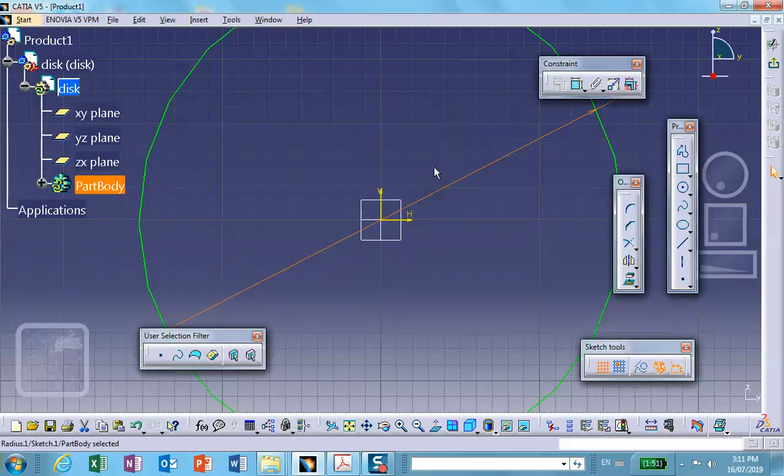And then we draw 3 circles here. This is the one in the center. The radius of all of these is 1. And another circle over there, and another one down here. We're going to position them in just a minute.

This one is diameter 2. This one also - not that one, this one is also diameter 2, and so is this one. Let's put some dimension between the center of this and that line - that's going to be 6.

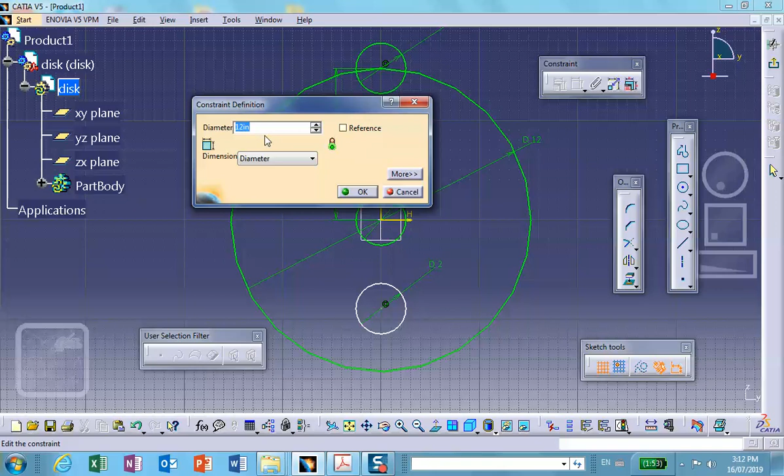Oh, I made a mistake - this diameter should have been 24 actually. That should have been 24. Diameter is 24, radius is 12. Okay, good, good. And then another one between the center of this circle and that guy is also 6.

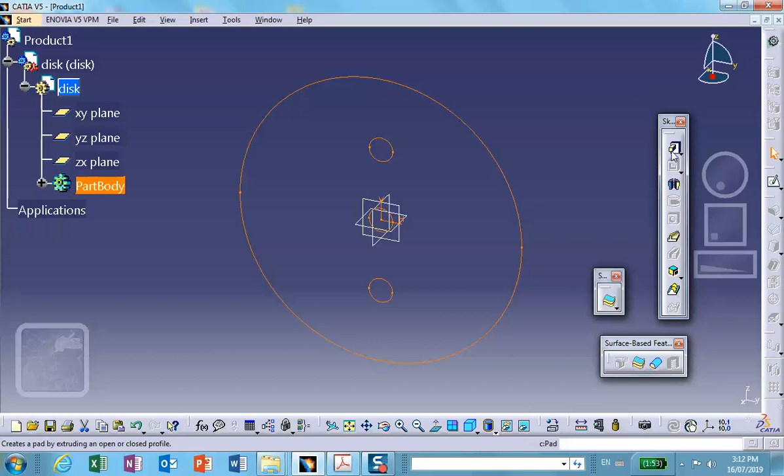So this is supposedly that disc that you see there with 3 holes. So exit, pad it. The thickness you're told is 2 inches, so we make a mirror extent 1 inch in each direction, and that gives us what you want.

Now I can insert the pin, insert a new part in there, and I'll call it the top pin. Right click, properties, top pin, and top pin. Okay, let's make it.

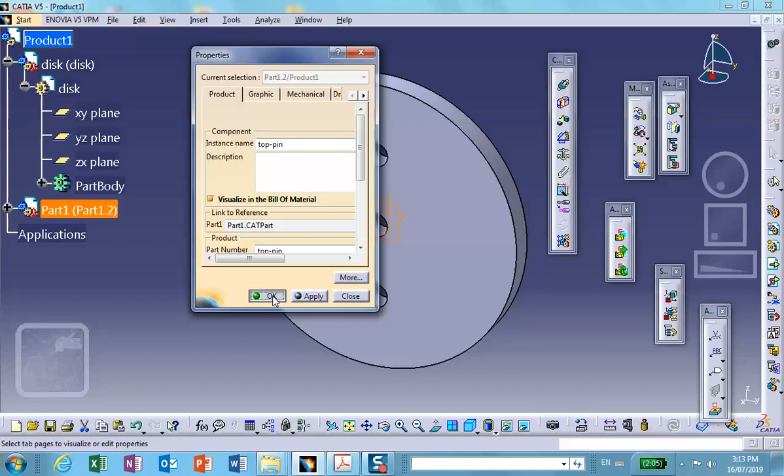So top pin, I'm going to project on that - let's see now - YZ plane. I will project, sketch, and project that circle. There we are. Exit, and then pad it symmetrically by 3 inches in each direction, so total of 6 inches. That's the top pin.

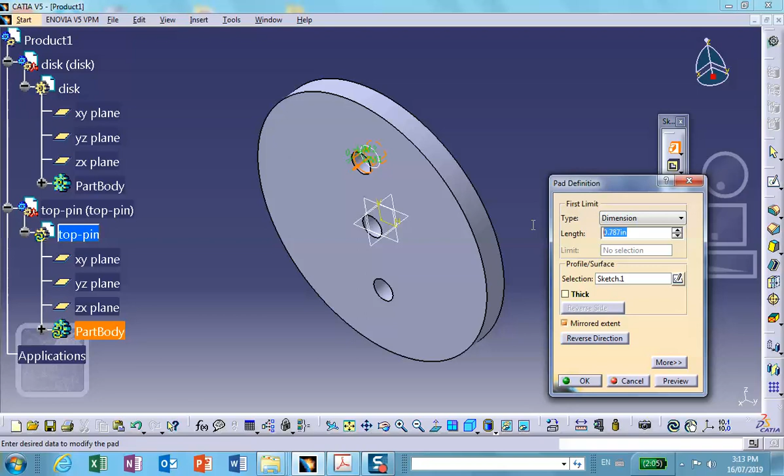Okay, now go back here, insert new part. Of course you can use that pin by copying it, but I'd rather make it properties. I'm going to do the middle one, middle pin - and down here also middle pin.

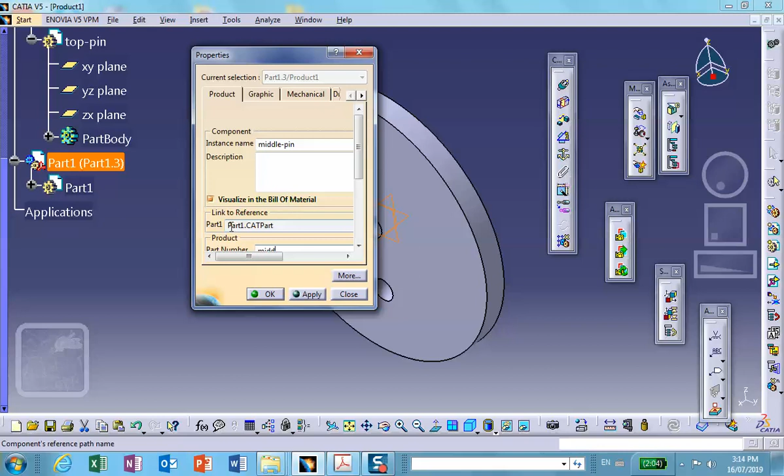Okay, and make it. So go there on that same YZ plane. I will sketch - repeat this process 3 times. This is ridiculous, but that's okay. Exit, pad it in each direction 3 inches.

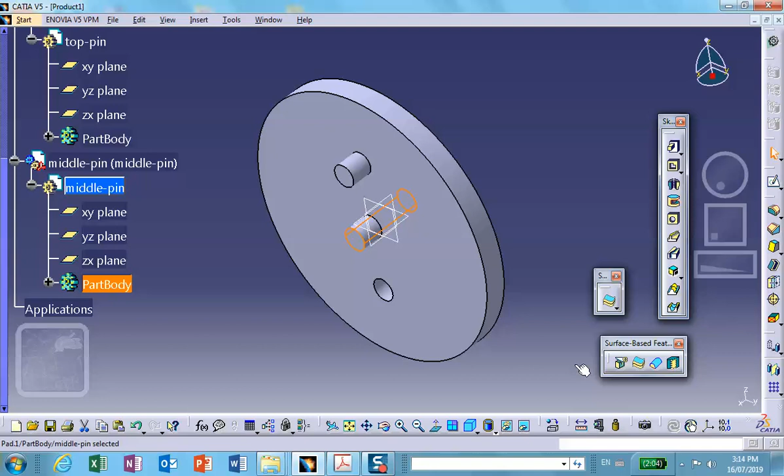And finally go up there, insert new part, say no, and this is going to be the bottom pin. Right click, properties, bottom pin, and same thing down here, bottom pin.

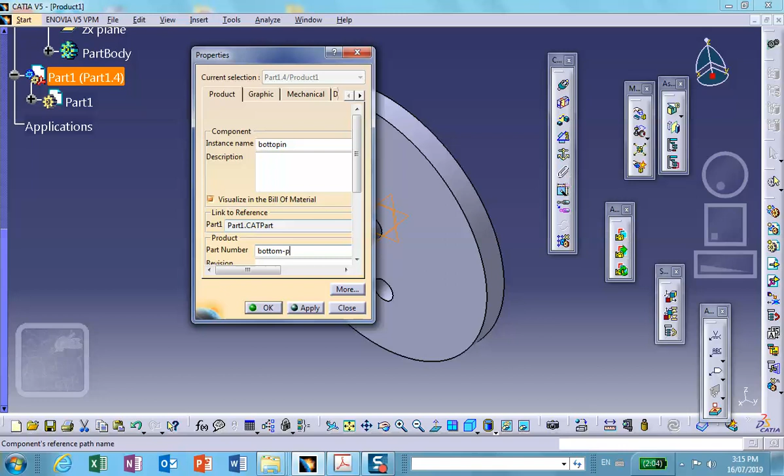Okay, let's make it. So go in there on that YZ plane, sketch, project that circle, exit, pad it in both directions, 3 inches in each direction. So that's 6. Okay, let's go ahead and save this thing.

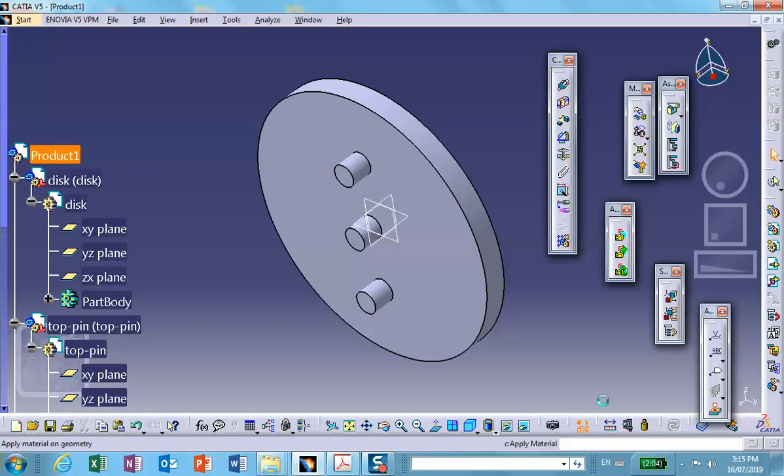By the way, this entire thing is made out of steel, so we go to assembly level, apply material. Where is this? Apply material - metal, out of steel, on the entire assembly. And okay, now we're going to save this.

File, save management, save as, desktop, new folder, assembly problem 2, or assembly problem - assembly disk and pin. Disk, pin. Okay, and we say open and say okay, save and okay.

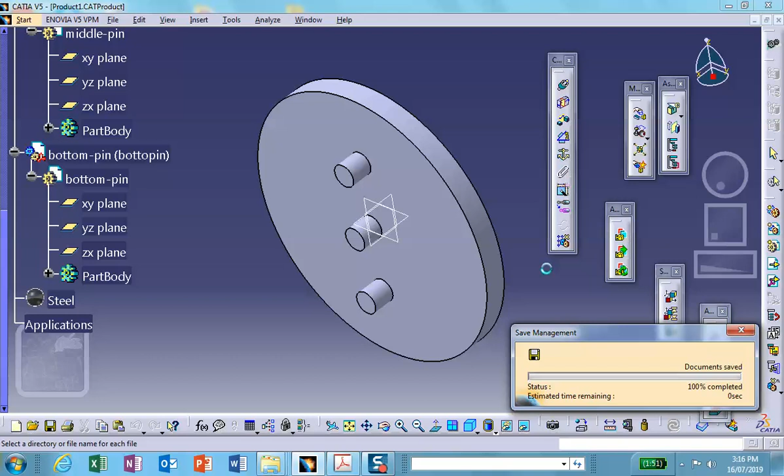Alright, now here's the situation. We are told that this top pin, the 2 ends are fixed, clamped, and the same thing with the bottom. And then we are taking the face here and the face on that side and pushing it in a certain direction, direction being direction X here, by some amount, okay?

So we obviously have a plane of symmetry, and that plane of symmetry is the XY plane and the YZ plane, both YZ plane and the XY plane. See that? The amount of displacement is 0.004.

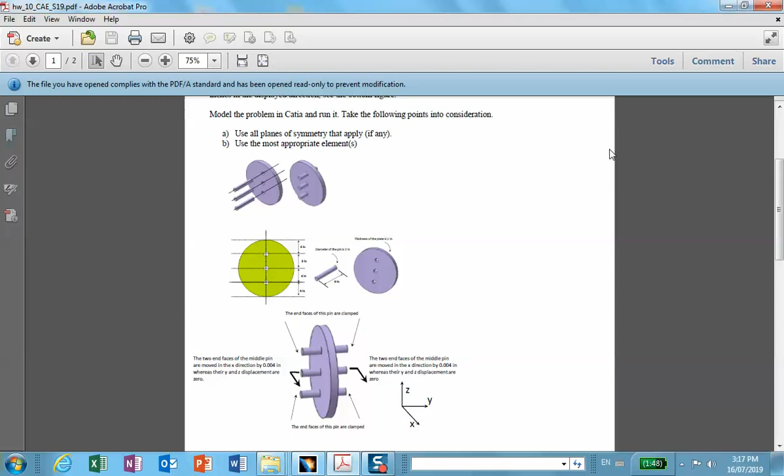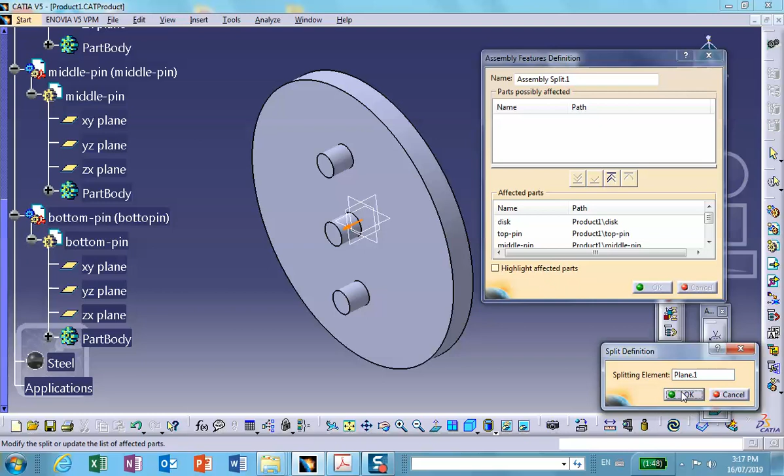Okay, so we have 2 planes of symmetry, XY and YZ. Now we can do these simultaneously in the assembly while we're here. Click on the split, select the plane. It says these 4 parts are affected - do you want all of them? The answer is yes. Which side do you want to keep? Okay, we keep that side. So this is the way it went.

And then we also have to cut it with the XY plane. Okay, so again the saw, split, this plane. It says these are all affected - are you sure? The answer is yes. And if it doesn't work, of course you're going to fix it. So there we are, this is it. The top and the bottom behave exactly the same way. Alright, so let's save everything.

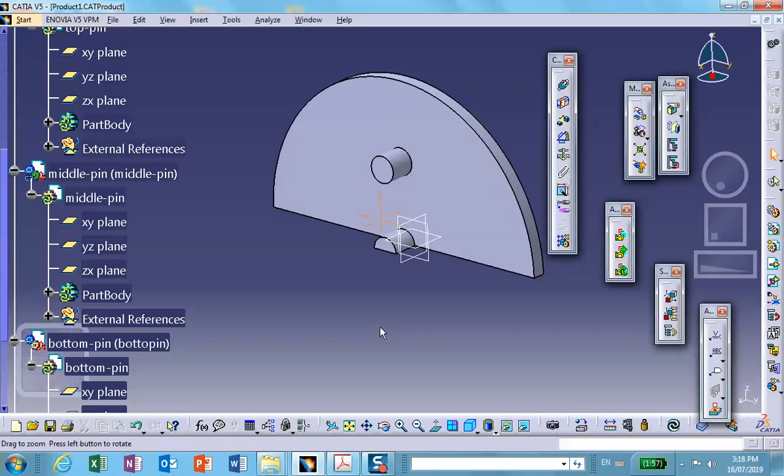Okay, we go to Generative Structural Analysis. CATIA immediately meshes these 3 parts. Now, of course, the disk itself is going to have a lot bigger element because of its size,

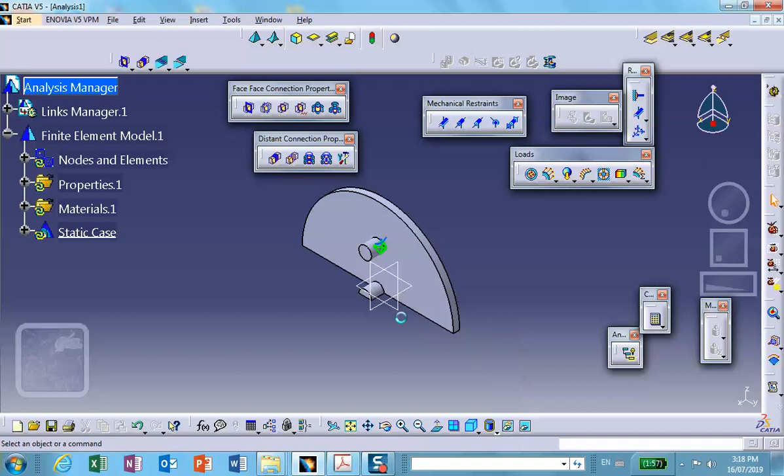and I'm going to change that. Notice that this one is for the disk. I'm going to change this to maybe 0.3 or 0.2, we'll see how it works. Then the top pin, I'll make it 0.2 so you can see it better. And the bottom one, let me make it 0.25. How about that, because I can't see it. Here 0.25, and this one 0.25.

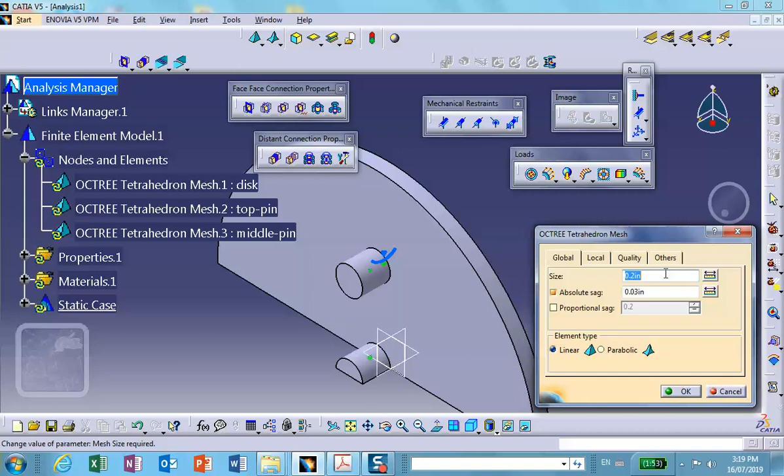0.25. Okay, very good. So let's look at the mesh now. Right-click Mesh Visualization. There we are. If you want different colors here, let's go to Properties, Graphics.

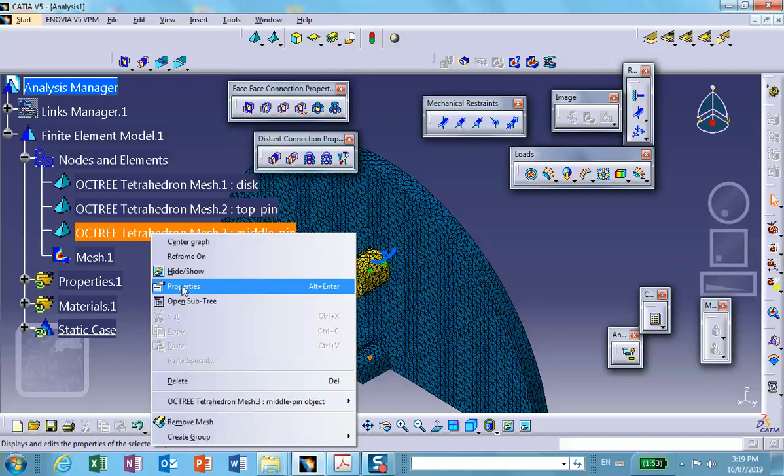For example, for the pin, I'm going to make it yellow, and also for the other pin, I'm also going to make it yellow. Properties, where the disk itself is kept at blue. I think these are too small, but our problems are simple, so we just leave it like this.

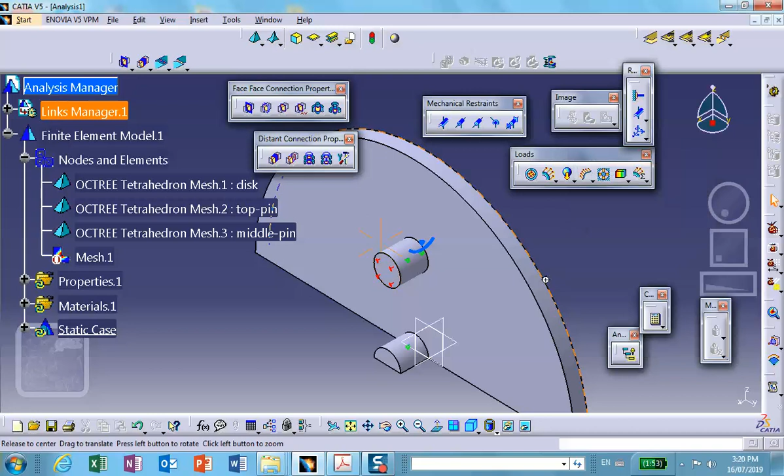Okay, fine. Now deactivate that, and let's start putting our restraints. So this end is clamped. Let's put our surface sliders here, planes of symmetry. This is a plane of symmetry. That is a plane of symmetry. And that is a plane of symmetry. And incidentally, this is a plane of symmetry, so is this, and so is that. So we took care of all planes of symmetry, no problem.

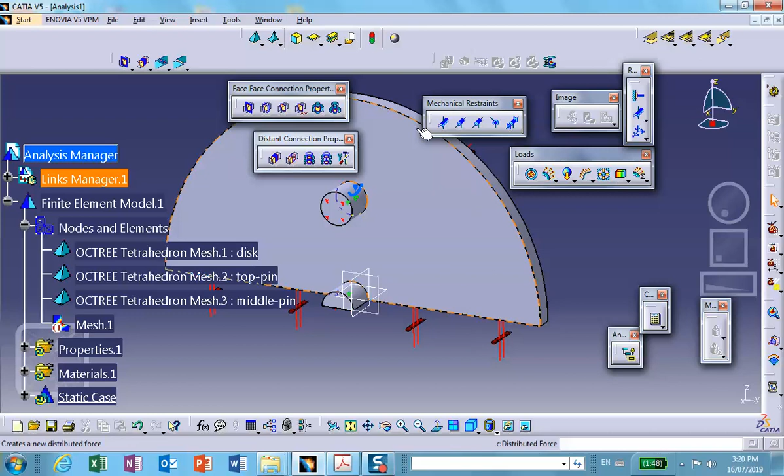Okay, and now we want to take this pin and push it in the y direction by 0.004 according to what the problem says. So we do a user define on that face, in the direction y. First you make it 0, and that's what this does, then you can change it. So enforce displacement on that restraint in the direction y, 0.004. I think that's what the problem says.

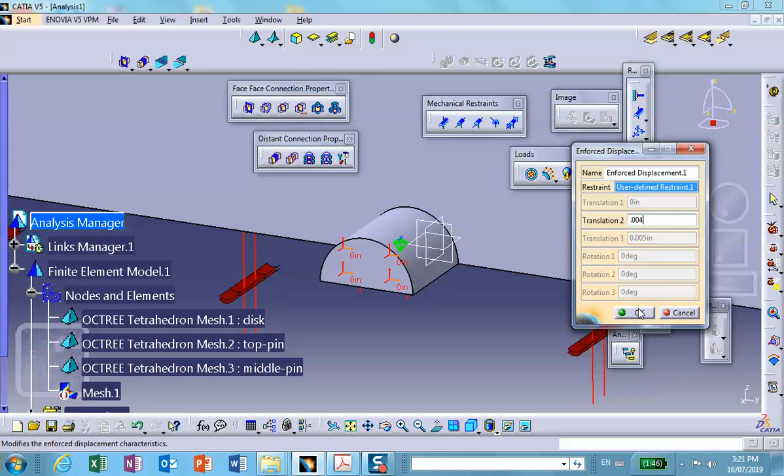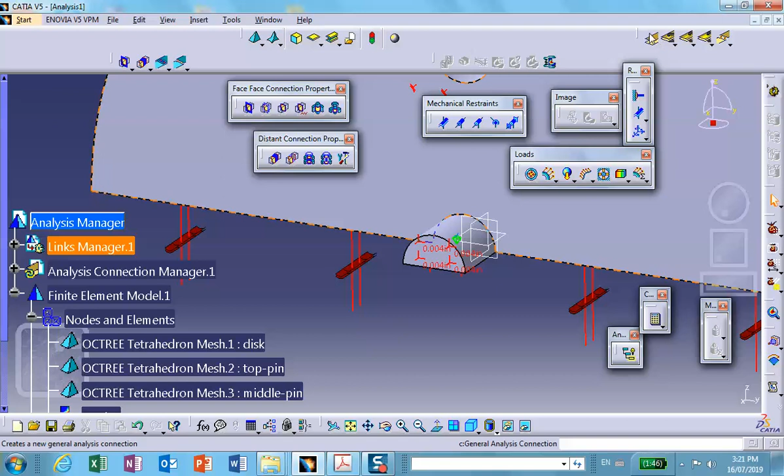Okay, now before we run the problem, we have to create connections between these. So we create contact connections, we discussed them in class. For the first component, the surface of this pin. For the second component, I'm going to hide this pin and select the surface of the hole. And this is going to be contact. And I'll do another connection, surface of this pin, and for the second component, hide this and select the surface of the hole. Also contact. Now what we have here, we have the contact.

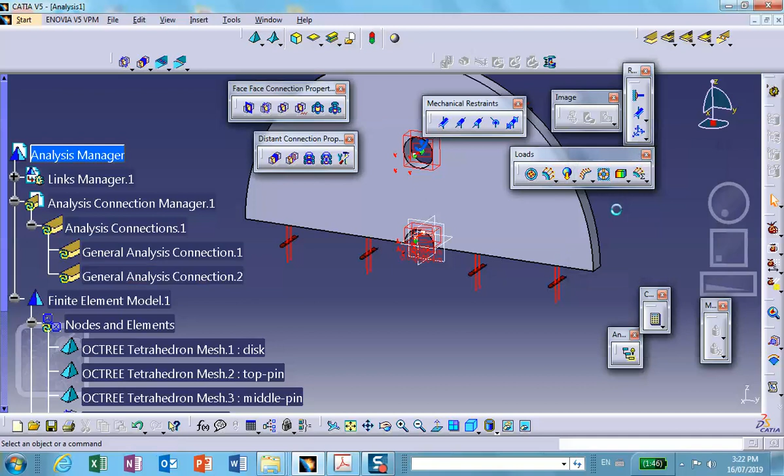Let's go ahead and do that. So where is the contact connection? Right there, it's in the face-to-face connection properties toolbar. So this is contact. And once again, this is contact. Don't fool around with clearance and friction and things like that, please. So let's bring these pins into show mode, although that's not necessary, we can go ahead and run the problem.

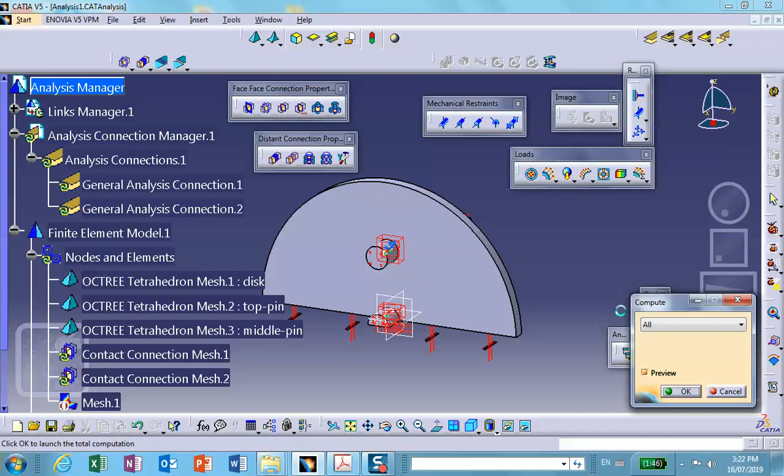Okay, and save the analysis, file, save management, save the analysis in the same folder, which was assembly of disk and pin. Okay, and run it. Ignore the warning.

And that's it. So let us look at our deformation and animate it. If you want to see it bigger, exaggerated more, so you can see it better, let's not use 252, the default. Let me use 400. Maybe more, 800. Okay.

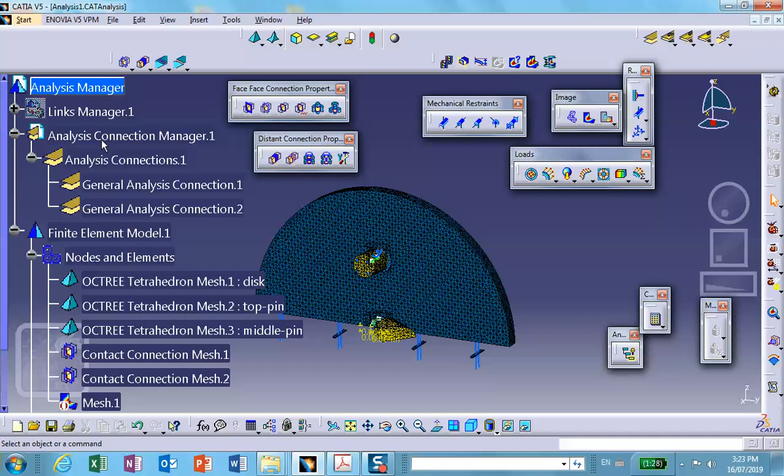Actually, let me clear all these things that we don't want. Hide this, hide the mesh. Oh, not the mesh. Hide these things. Hide. Let's hide all the restraints, all the properties. Let's hide the restraints and the load.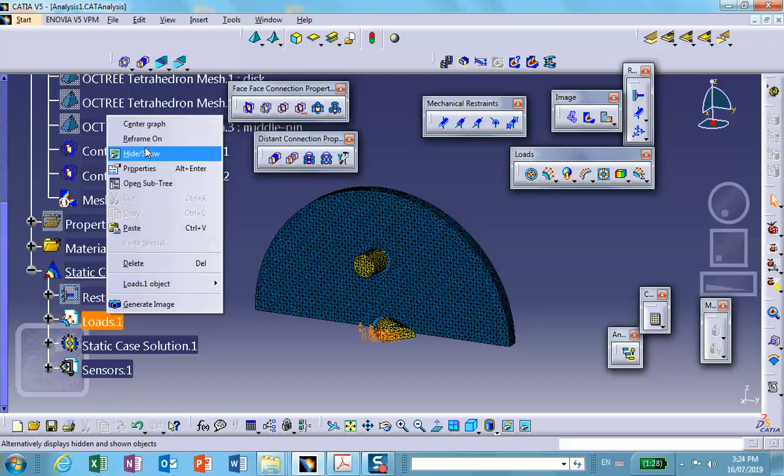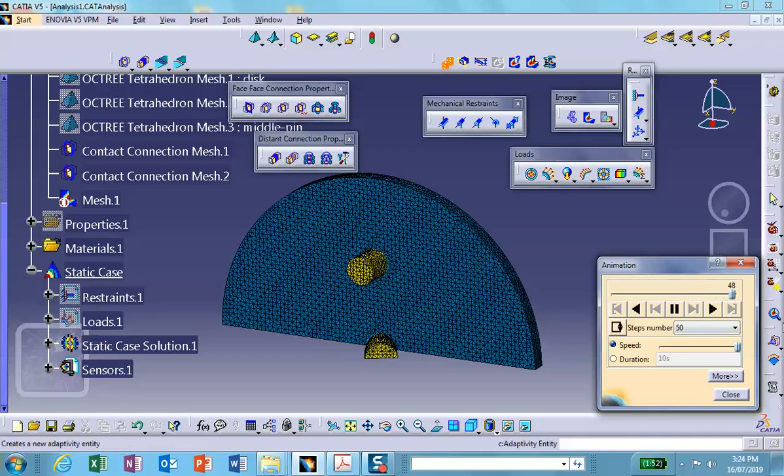Now here's what we did. This was too much of an exaggeration, so let's put it back to 400. Okay, good. And we can animate it. You see that it works fine. In other words, the top pin was clamped, this bottom one is pushed in a certain direction, direction Y, by the amount given. If you look at the displacement, change it to average ISO, change the rendering to material shading. You can see that.

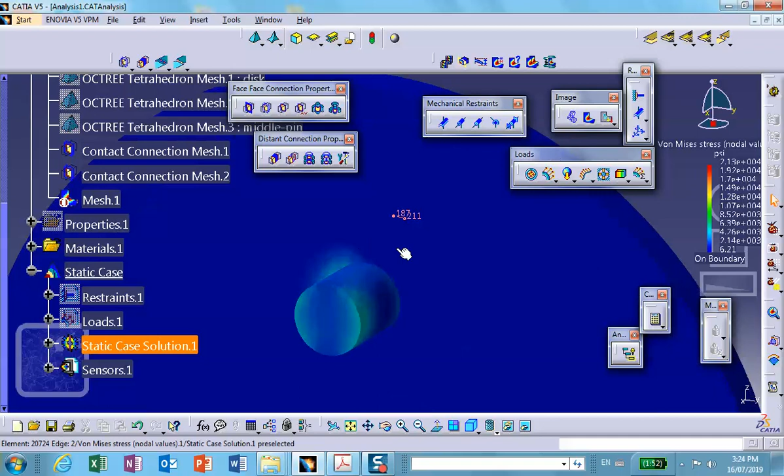And if you want to look at the stress, von Mises stress, obviously the biggest stress is going to be in this area, maybe due to bending, maybe due to the fact that this is pushing on that.

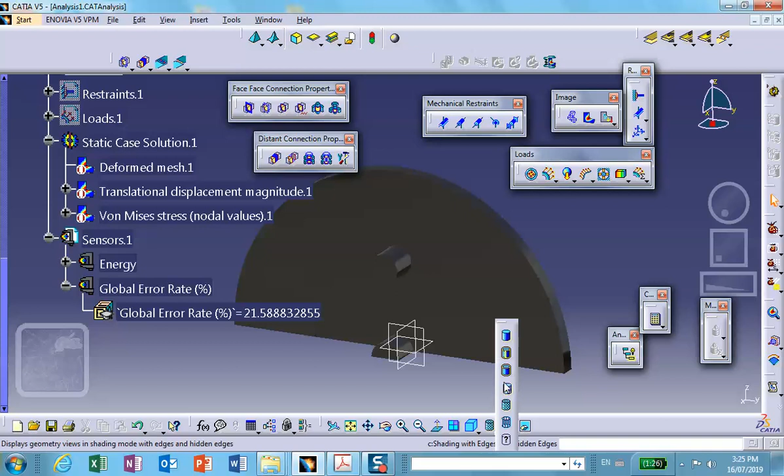I think in the question you're being asked how much force is needed to cause this displacement. So what you do is, first of all, deactivate this plot. Okay, let me change the rendering here, I don't like this material shading rendering. So right click, resultant sensor, reaction sensor, and then select the restraint that you put in pushing this. So right here, I think this was that guy, okay? And then update result. So you get roughly almost 4,000 pounds.

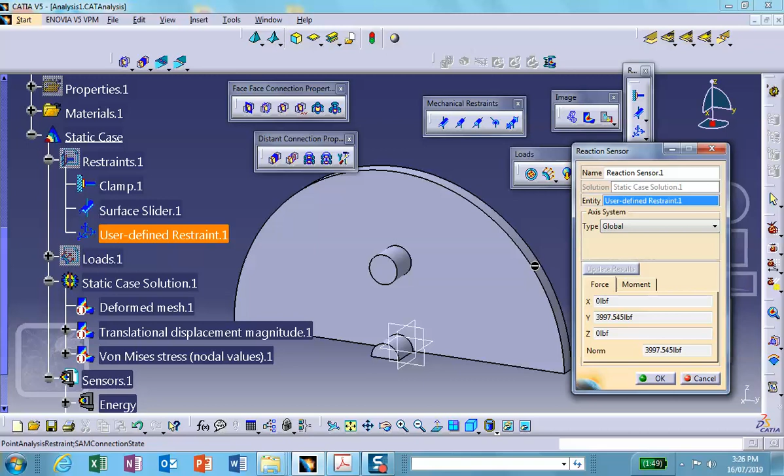Now remember, you have to get the actual force needed for creating this deformation, because this is for half of the model. If you want the actual one, you need double of that: 4,000 on this side, and 4,000 on the other side. That's a lot of force, but remember, this is a piece of steel, 2 inches thick, so it doesn't surprise you. So the answer to this problem is actually this thing times 4, not times 2, because you have the top and the bottom, that's a double, but there's the other side, which is another double, so that's 4. So that's pretty much it.